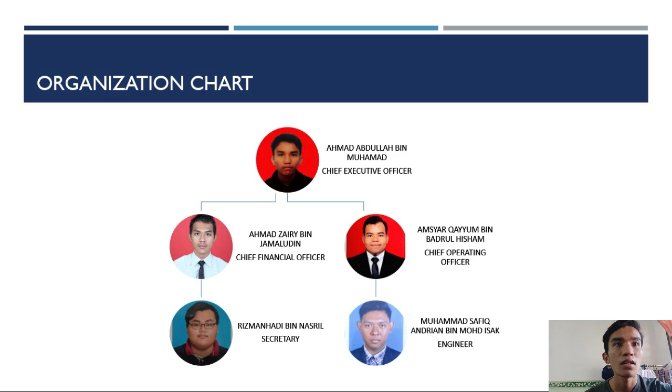RIZMANHADI bin NASRIL as Secretary, and Muhammad Safiq Andrian bin Muhammad ISAK as our company engineer.

Okay, next is our time plan. Our time plan starts from week 5 until week 13.

Starting from week 5, we meet for the company profile. On week 6, we discuss the project background and job distribution.

On week 7 and week 8, we start to design ideas and the design process for final selection. From week 9 to week 12, we do product development and evaluation on function and cost.

Starting from week 13, we discuss the product structural and possible improvements, the final conclusion about the product, final report writing, design review, CAD modeling, and lastly presentation.

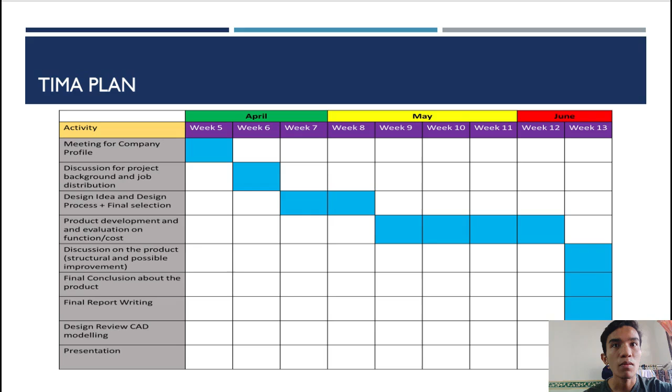Chapter 1, Introduction and Background Theory. Starting from week 6, our project title is F1 in School.

Our objective is to enhance automotive vehicle abilities, upgrade the automotive parts and components design, and improve the material on the automotive parts and components. Our problem statement is that the car easily experiences drag through the driving system.

A car that is too heavy increases drag. Lastly, more friction results due to the car specification.

Our scope of project focuses on the automotive design specification with new design through the manufacturing of the car parts components due to some fault or unnecessary design.

This is our team member job scope. Chief Executive Officer, me, Ahmad Abdullah. My job scope is communicating on behalf of the company, leading the development of the company's short or long-term strategies, and creating and implementing the company's organizational vision and mission.

Next, Chief Financial Officer, Ahmad ZAIRY bin JAMALUDIN: build financial models, analyze and prepare financial statements, and reconcile income and expenses of the company.

Next is Chief Operating Officer, AMSYAR QAYYUM bin BADRUL HISHAM. His job scope is designing and implementing business operations, establishing policies that promote company culture and vision, and overseeing operations of the company and the work of executives.

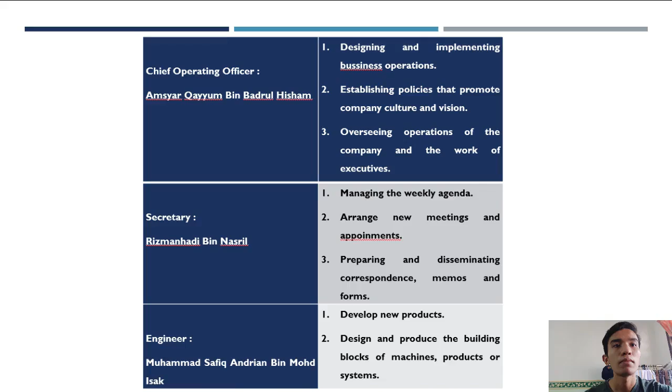Through main body until rear wing. So let's move on to the introduction first. The F1 in Schools car is designed and manufactured according to the regulations of the F1 in Schools track.

The car is powered by a single 8 gram compressed air cartridge that will enable the car to travel a distance of 20 meters, withstanding forces of launch acceleration, track traversing, and physical deceleration.

So during the race, the car or prototype will first accelerate with the help of the air cartridge function, which makes the car travel in the track on a linear path. This will consist of a straight line race, followed by physical deceleration, meaning that after traveling, the vehicle or prototype will experience deceleration at the end of the race.

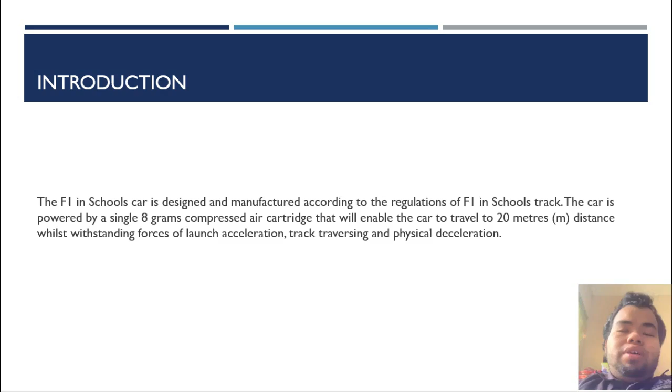Alright, that's for the introduction. Next we move on to the parts function. So what do we have in the parts of our prototype?

Firstly, we have the main body. The main body is a single uninterrupted piece of F1 model block material existing rear of the front axle center line and encompassing both the virtual cargo and the compressed air cartridge chamber. So on the main body, there will be a figure drawn, basically from a block.

Then we designed various types, for example, the hole for the drive shaft and the air chamber cartridge. Also virtual cargo, there is a hollow area in the main body inner side.

Next is the compressed air cartridge chamber. It is a cylindrical clear space bounded around its inner circumference and one end by the car body only. This is where the compressed air cartridge is placed for launching.

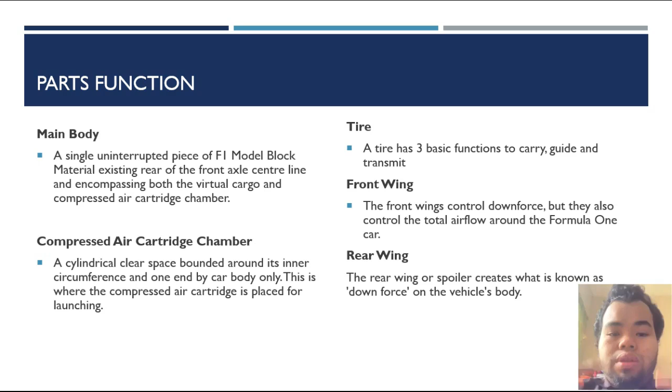So that's for front wing and rear wing. Next, we move on to the wheel. Wheel: a single part or assembly of components, cylindrical in form, with its maximum circumference contacting the track surface, allowing for forward motion of the car through rotation.

We know that this prototype will only move forward after experiencing the air compression. So the wheel is a thing that is combined with the tire. Like in our daily life, there will be wheel and tire, and we combine them together to perform a device that will rotate and guide and drive the vehicle.

Next, we have the drive shaft. The drive shaft is a component of the drive train in a vehicle, with the purpose of delivering torque from the transmission to the differential, which then transmits this torque to the wheels in order to move the vehicle.

By using the drive shaft, mainly in our daily life, it will be from the engine, then to the gearbox. But in our case, for this F1 in Schools project, the main power of this prototype is from the air chamber that will experience air cartridge push. So for the drive shaft, as commonly known, it will transmit energy through the tire and wheels that will drive the vehicle.

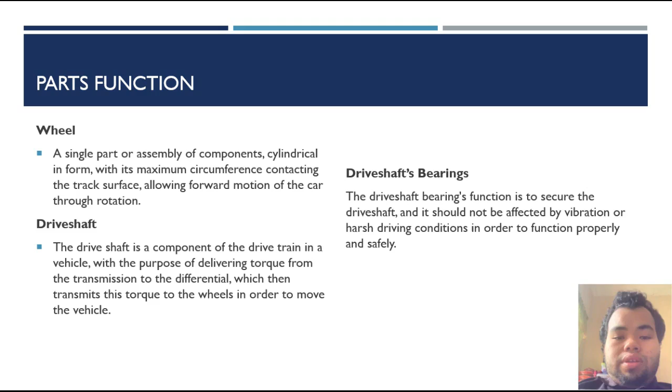So the bearing will make a smooth rotation for the drive shaft. As a result, it will result in fluent or fine driving or fine moving of the prototype.

Next, we move on to chapter 2. Chapter 2 is what we have done in week 7 until 8 about concept design sketching. And now we can see there is the main body. The main body, like I said before, it consists of a block that will be pad or pocket.

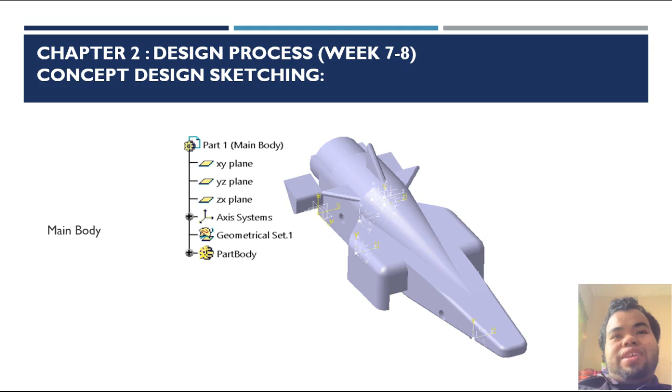From the diagram of our main body, we can see there are 3 fins added to our design, which was designed by our group mate Ahmad ZAIRY. This will make our prototype look stylish, and probably, or maybe for sure, it will be a fierce like car. So this is maybe an amazing style for a prototype of vehicle.

Next, we have the air cartridge chamber, compressed air cartridge chamber. Like I said before, it is a part that is drawn using inner circumference. So we make a new size of circle here, and then we pocket it, and that's how we make it. So it will function by using the compressed air cartridge to push the air cartridge chamber, and the result will push the prototype to move in a straight line for 20 meters of distance.

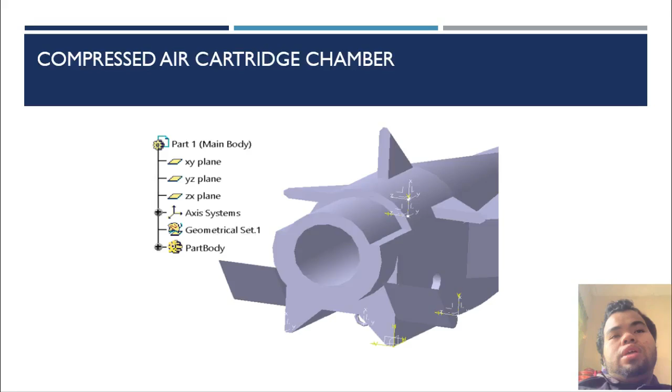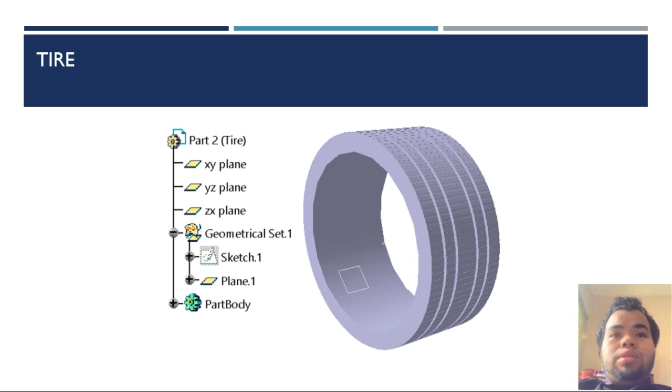Next is the tire. The tire will be used and combined with the 4 wheels also in the project. The tire is made of rubber, as commonly we know, consisting of inner diameter and outer diameter. For the inner diameter we will make a pocket, while for the outer diameter, firstly we will make a shaft of the outer diameter, then we'll make a new circle on the inner diameter, and pocket it to perform and result in drawing a tire.

Next, after tire, we have rear wing. Rear wing is a part at the back side of the vehicle. This rear wing is drawn by our group mate ABDULLAH, while I drew the tire just now. The rear wing consists of plastic material in our project. You can see it is drawn mainly by using pad. So by using pad and some fillet, it results in this rear wing. Also, pocket is used in this drawing of the rear wing.

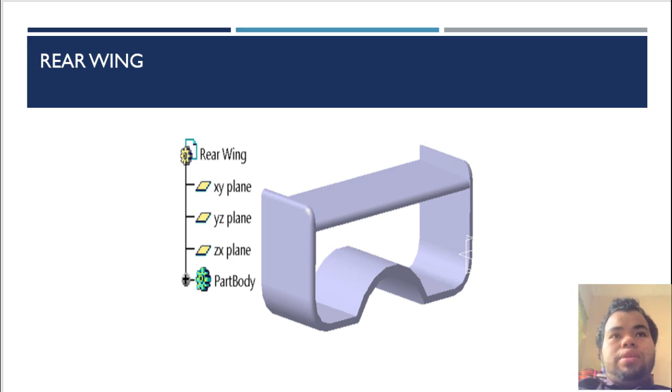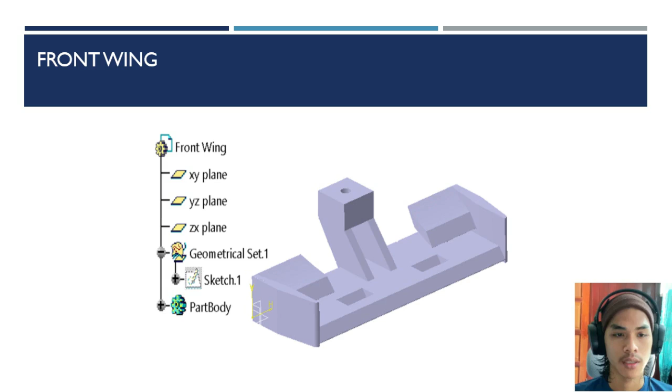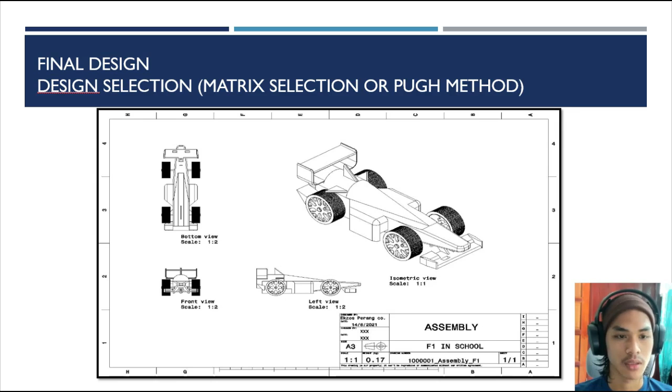So this is the flowchart design of the product. First is identify the product design, which is the model for F1, mini F1, and then we go to specify requirements, which were already given to us by Encik Zulusni, and then finalize an idea, where we make a tweak to the product design, our own variation for the product, and then we develop the prototype design, where we as a team were given our own part to produce.

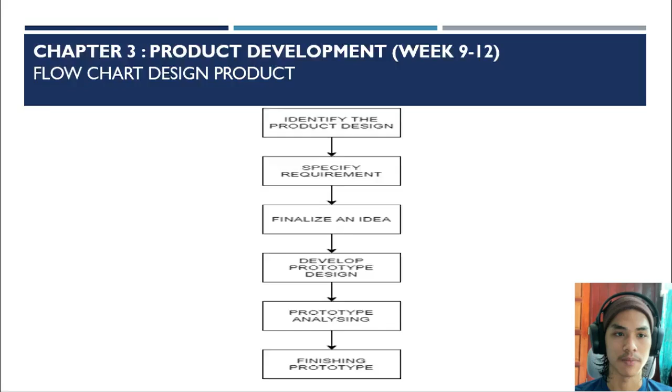Such as the front wing is for another person, and the wheel is for another person, and then prototype analyzing, which is the von Mises stress, analyzing the deformation, and the displacement analysis. And then we come to the final product, design product, which is finishing the prototype. This is the assembly view for the prototype, which is the product after assembling all the parts.

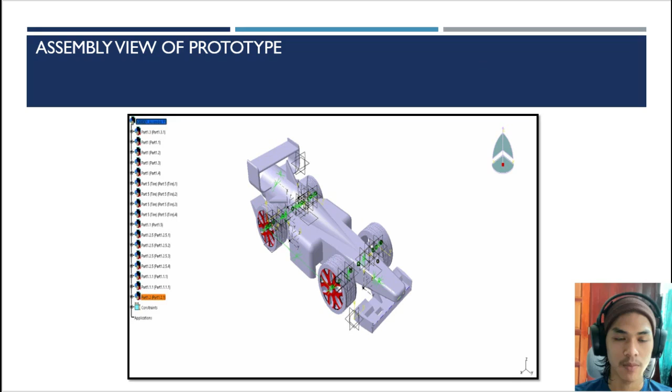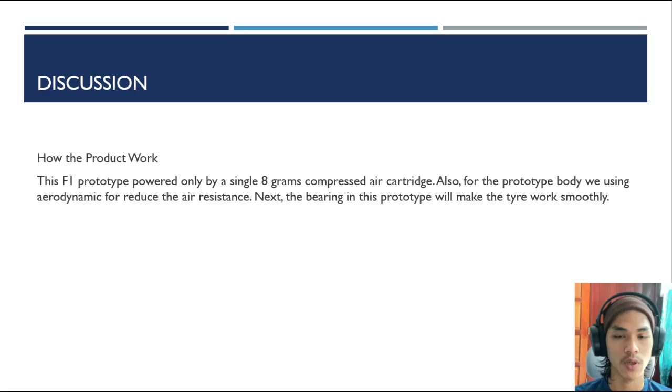So how does the product work? This F1 prototype is powered by a single 8-gram compressed air cartridge. Also for the prototype body, we're using aerodynamics to reduce air resistance. Next, the bearing in this prototype will make the tire work smoothly. As you can see from the assembly, from slide number 12, we have the compressed air cartridge chamber, where the air cartridge is installed.

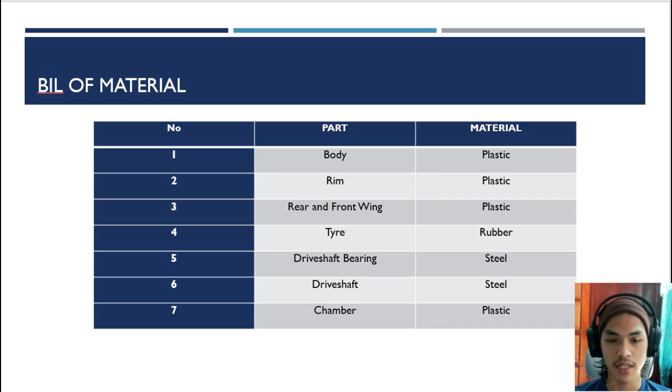So for the bill of materials, we have 7 parts. The first one is the body, which we have only one of, made from plastic material. And then we have the rim, which is also made from plastic. The rear and front wing are also made from plastic, and the tire from rubber. The drive shaft bearing and the drive shaft are made from steel, and lastly the chamber is also made from plastic.

So for cost calculation, the material cost for each unit per production is 15 ringgit, and from that 15 ringgit, 10 is manufacturing expense, and then calculating the total is 35 ringgit because the labor cost is RM 20 per unit, and then the sale price is 40 ringgit because the profit is 5 ringgit per unit.

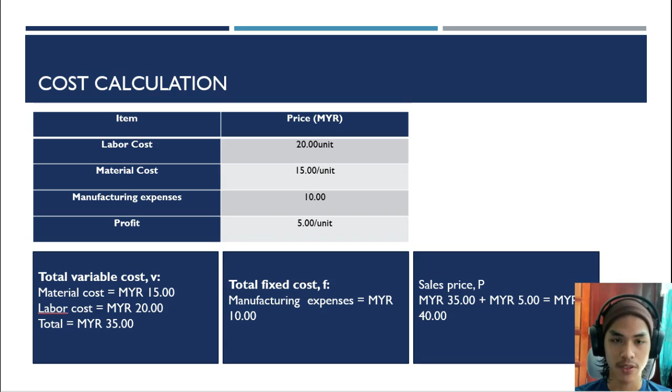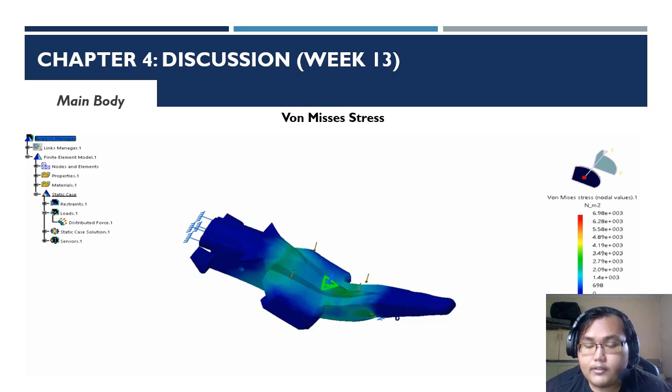Okay, I will discuss the analysis of the body part. For the von Mises stress, what is the von Mises stress? Von Mises stress is a value used to determine if a given material will yield or fracture. For this body part, the von Mises stress is 6.98 E plus 003.

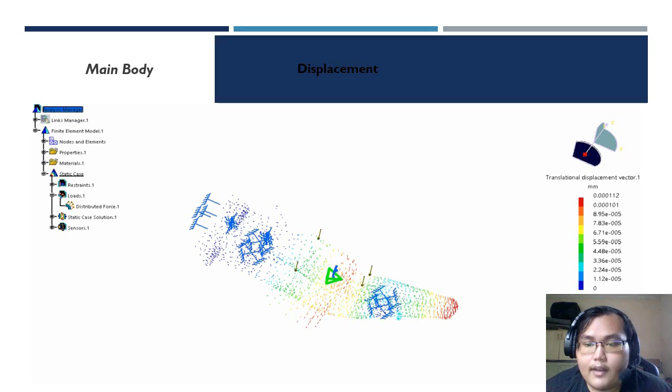Next, about the displacement. Displacement is a vector image used to visualize the displacement field pattern, which represents a vector field quantity equal to the variation of the position vector of a material particle of the system as a result of environmental action. So we can see the highest is 0.000112.

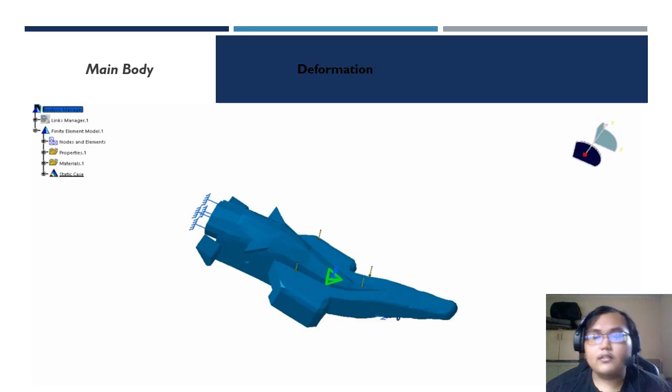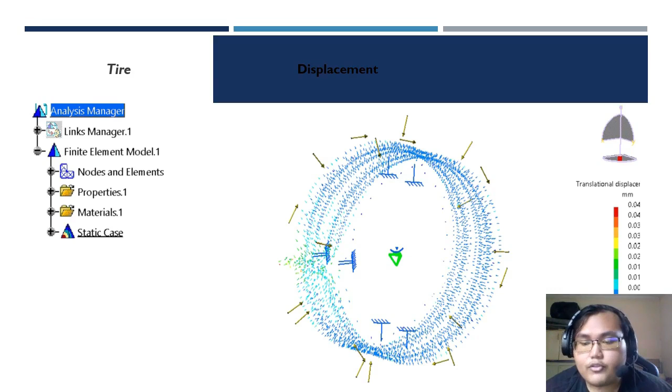For the rear wing, the von Mises stress that we got is 6.46E plus 003. So we can see it's bending at the center of the wing.

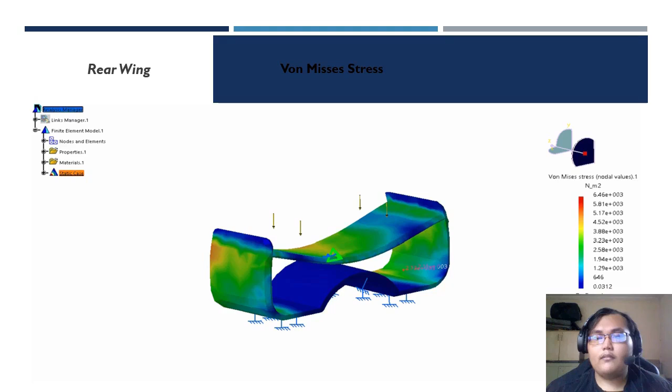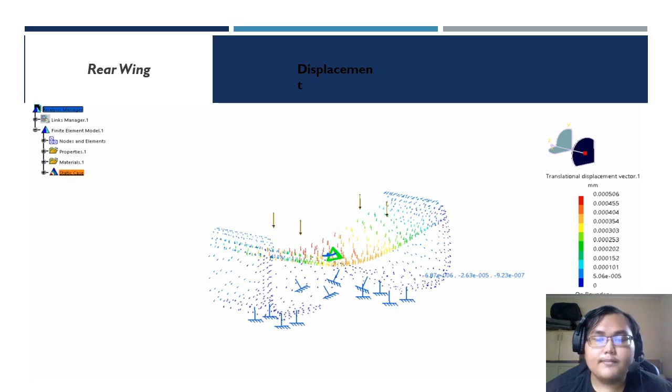Next is the displacement for the rear wing. The highest is at 0.000506 at the center of the wing. Next is the deformation of the rear wing.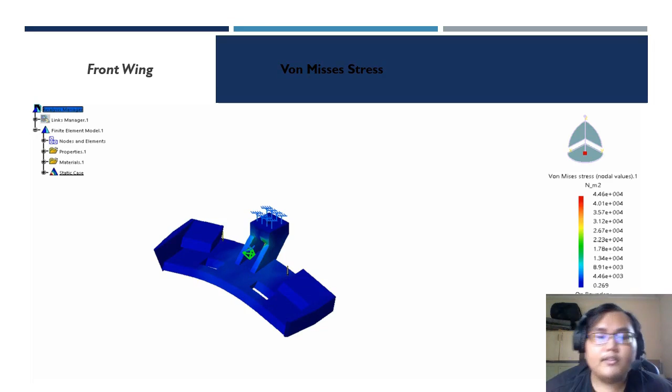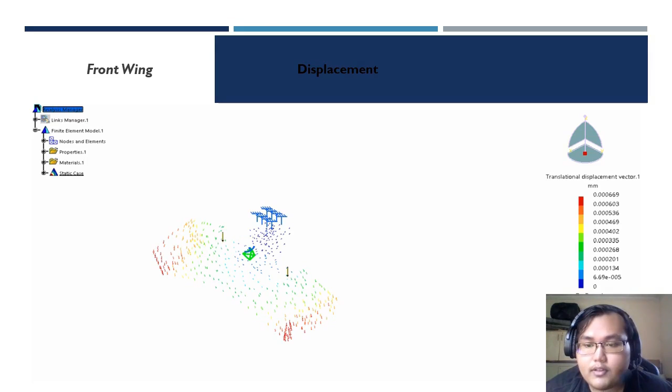For the front wing, the von Mises stress is at 4.46E plus 004. Next is the displacement for the front wing. The highest is 0.000669. And this is the deformation of the front wing.

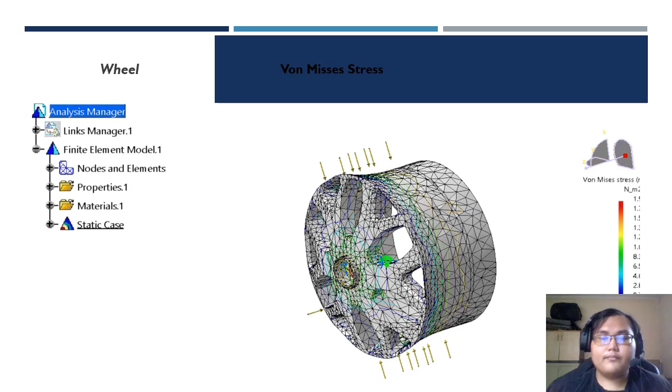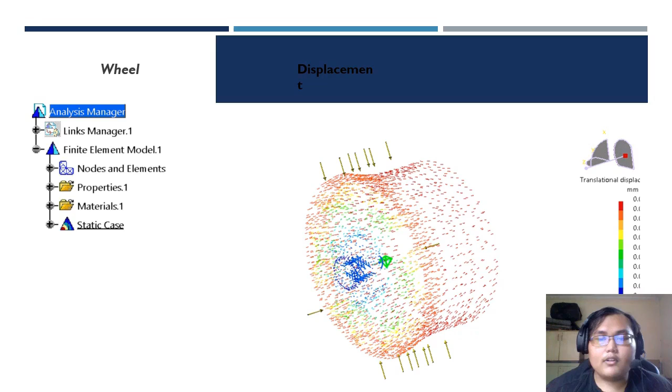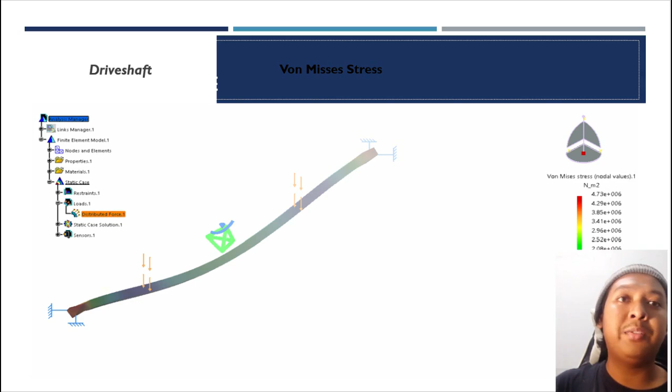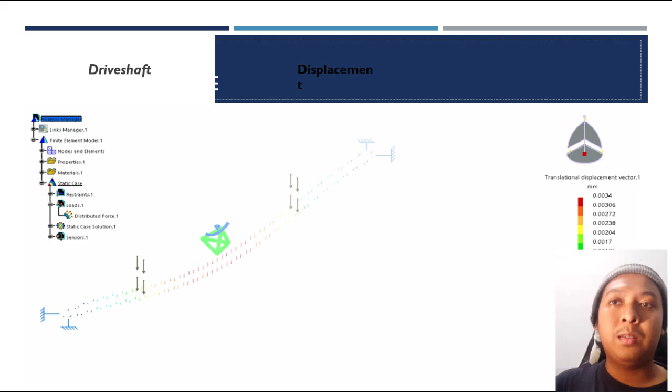So this is the displacement vector. We got the displacement result of 0.0034 millimeter. This is the deformation, and the shape looks like this because we apply the force at the middle, and we clamp the drive shaft at the left and right side.

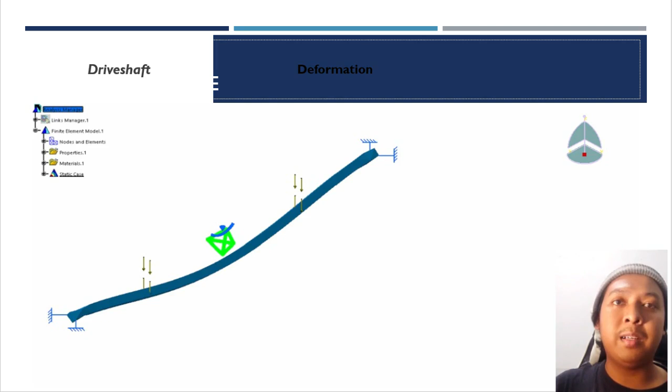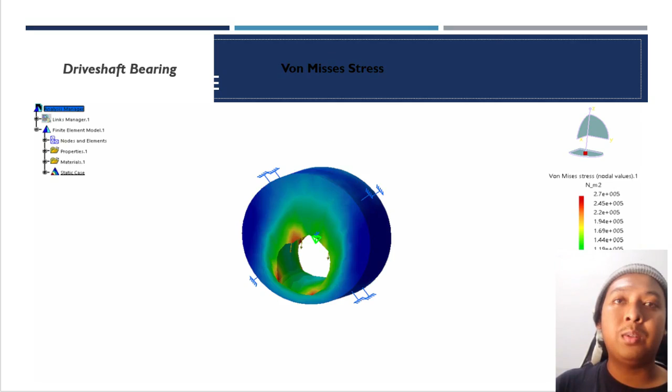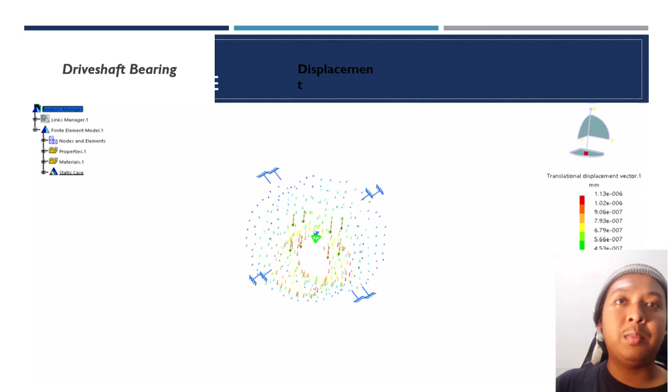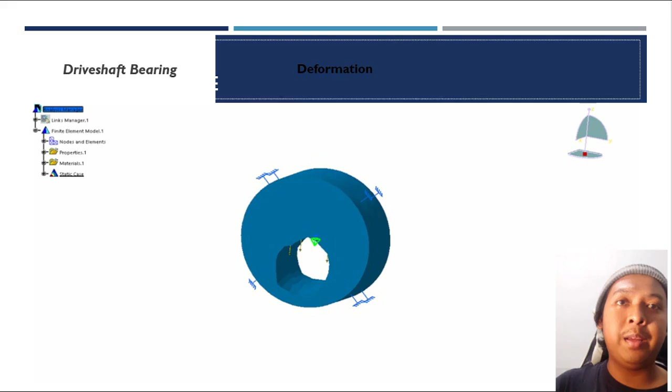The displacement vector for the bearing, we got 1.13 times 10 to the power of negative 6 millimeter. So the deformation looks like this because we clamp around the bearing, and then apply the force inside the hole.

Now I will present the safety factor. The formula is ultimate stress over actual stress. So we calculate part by part. The first part is the main body. The result for the main body is 0.467, meaning it passes and is not across the line. So the result is passed.

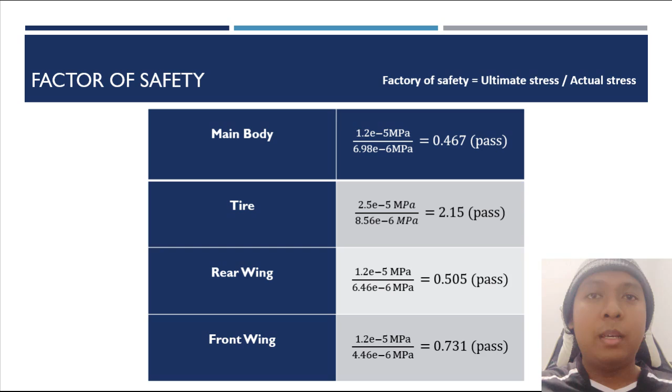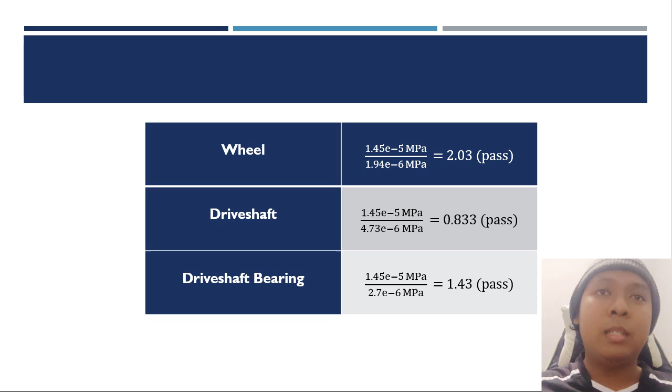Next, the tire we got is 2.15. The rear wing is 0.505, and the front wing is 0.731. Next, the wheels we got is 2.03, and the drive shaft is 0.833, and then the last part is the drive shaft bearing, which is 1.43. So that means all our parts passed.

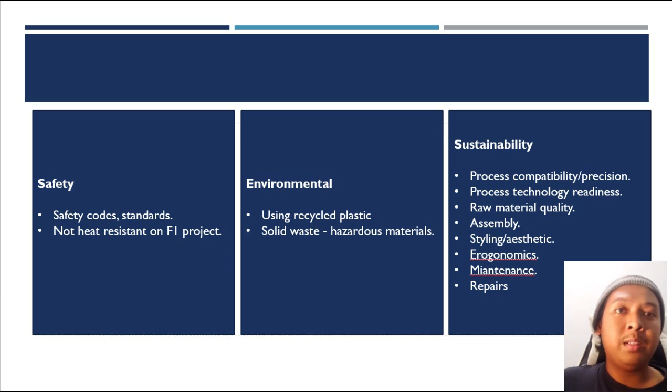Second last, we have safety, environment, and sustainability. For safety, the safety code standard is that it doesn't have heat resistance on the F1 project. For the environment, we used recycled plastic, which is not a hazardous material. For sustainability: process compatibility, process technology readiness, raw material quality, assembly, stylish, ergonomic, maintenance, and repair.

Lastly, the conclusion. Based on the objectives for this project, our group gained the idea for this conclusion. In this project design, our group learned how to improve the design of components and parts of this F1 car.

Air resistance or drag can be minimized, and for the prototype body we use aerodynamics to reduce air resistance. Besides, we also improved the material used for the product, such as using steel for the drive shaft bearing and plastic for the main body, rear wing, and rim front wing. The tire we use is rubber, and by improving the material, it helps reduce the weight of the car, thus reducing the drag.